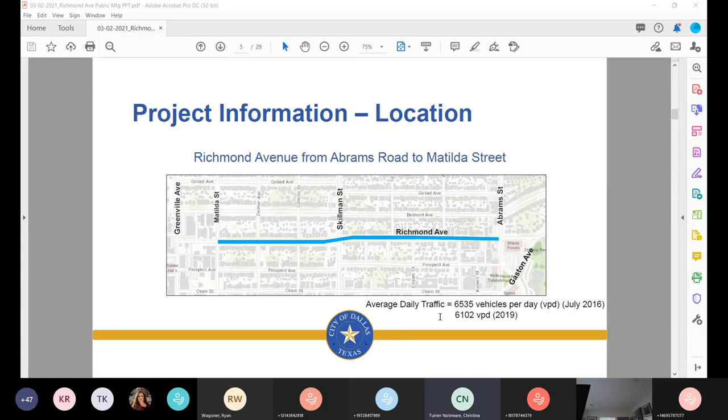The 2017 bond project did approve funds to do a pavement overlay on Richmond between Matilda and Abrams Road, at about $1.275 million. The intent of the project is to include bike lanes, physical bump outs at designated street crossings, enhanced painted crosswalks, and new flashing beacons at selected crosswalks, dependent upon funding and approval guidelines.

The Richmond and Skillman intersection will also be reconstructed to remove the channelized right turn lanes and install a new traffic signal. There's about $350,000 in the budget for that.

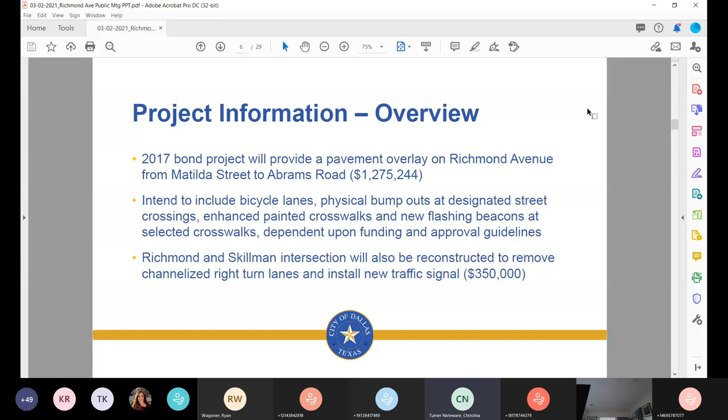At our October 29th, 2020 meeting, we had a public survey where we asked five primary questions: What do you like about Richmond Avenue? What should the primary goal be for the project? What's your connection with Richmond Avenue? What other improvements would you like to see made to Richmond between Matilda and Abrams? And then we had preliminary improvement options 1 through 5.

So we're going to talk a little bit about the feedback we received from the survey. We had 314 responses that came in. There were 37 that were very obvious duplicates, so we had 277 total responses.

Regarding the question of what do you like about Richmond Avenue, some of our most popular responses were 'not much' and 'nothing' - about 27 of those. Being able to park on both sides of the street, about 30 responses. A lot of folks talked about the neighborhood and the community, about 27 responses. And then about 19 responses regarding a wide street.

Looking at question number 2, what should the primary goal be for this project? We provided five options: the first being slow traffic, the second improve safety, the third improve the appearance of Richmond, the fourth provide options for alternative modes of travel such as biking, scooters, etc., and the last being other, which required people to enter text.

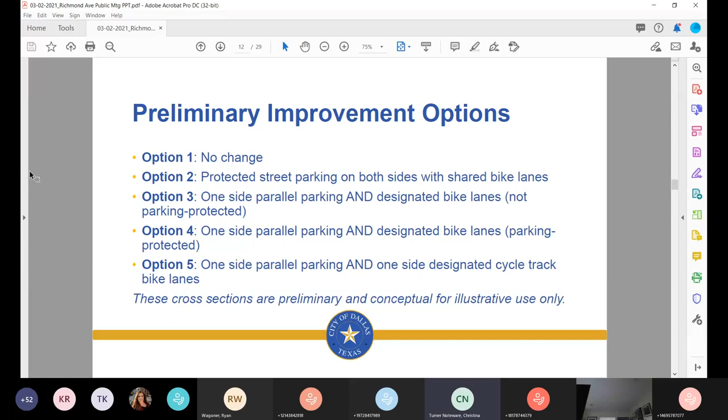Looking at the preliminary improvement options we provided at the last meeting, we had 5 options as a reminder, so we'll go through these one by one. Option 1 was really no change, leaving it with two 13-foot travel lanes and two 9-foot parking lanes on the sides.

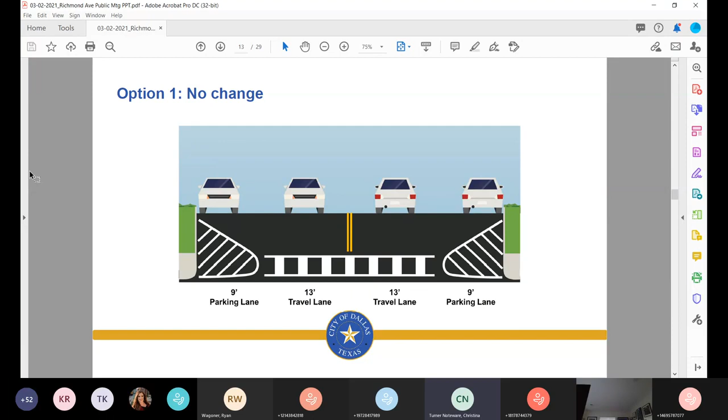Option 2 was protected street parking on both sides of the roadway with shared bike lanes. Option 3 provided one side parallel parking and designated bike lanes. Option 4 provided one side parallel parking and designated bike lanes, but that bike lane was parking protected, meaning the parking lane was between the drive lane and the bike lane. The last option had one side parallel parking and one side designated cycle track bike lanes.

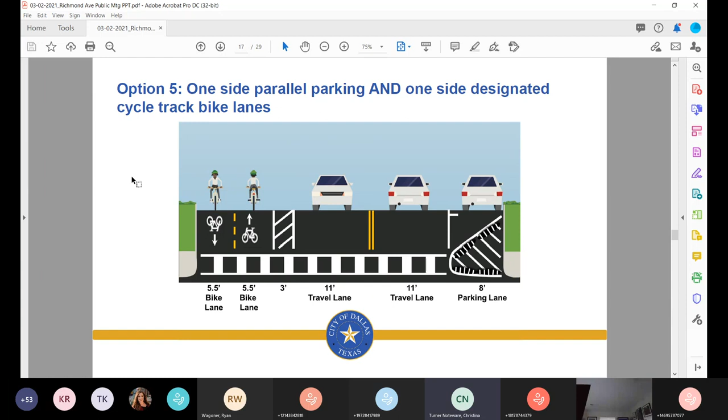After receiving and condensing this feedback, we looked at what most people wanted: one side parallel parking and designated bike lanes, not parking protected. But we also got a lot of comments about the parking and not taking it away. So we've provided some refined improvement options.

Option A is protected street parking on both sides with shared bike lanes—basically the former option 2 presented during round 1 public engagement. We looked at every possible way to try to provide parking on both sides of the roadway along with bike lanes, and there just isn't enough real estate between the curbs to safely make that happen.

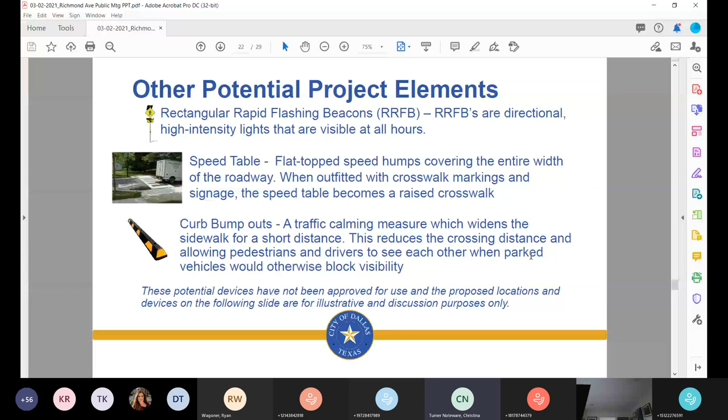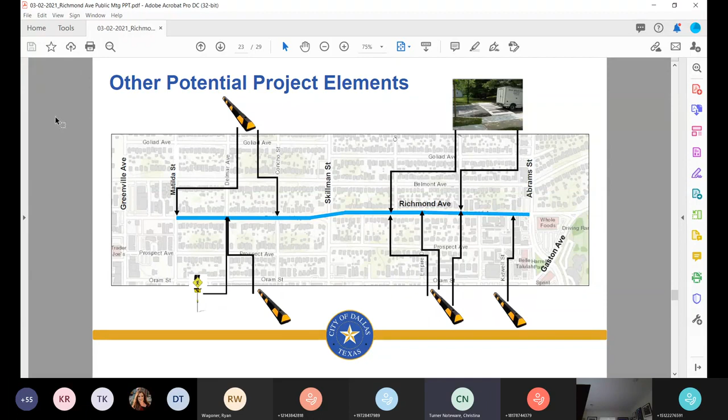We are also redoing the Richmond and Skillman intersection. Currently, this intersection, if you're going east, has a free flow right turn lane onto Skillman, and if you're coming west, you have the same thing, a free flow right turn lane. One of the things we're doing as part of this project is eliminating those free flow right turn lanes. We're installing new barrier-free ramps on all four corners.

We're installing a new traffic signal. We'll have one through lane of traffic each direction on Richmond, and then we have our planned bicycle lanes.

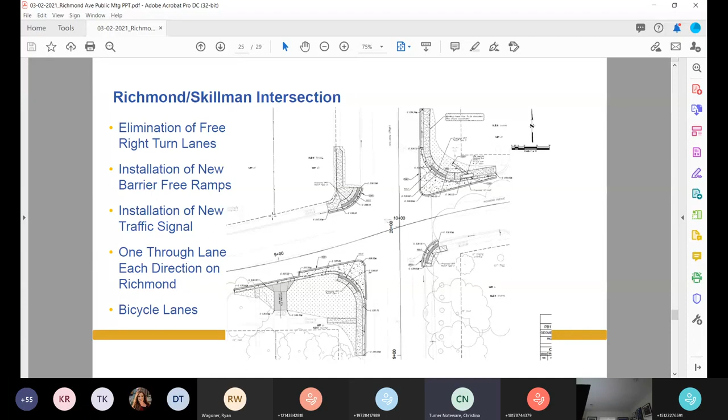It is mandatory to fill out the survey with an email address. We did not do this on the last survey. We're doing it this time to try and cut down on the number of duplicate responses we receive. The surveys are set up in Google, so you do have to have some type of a Google account, and it will ask you for an email address to do the survey.

The deadline to provide input is March 16th, that's 10 working days from today. So again, we want your input on which refined option you prefer, option A or option B, and if option B is selected for the project, do you prefer parking on the north or south side of the road?

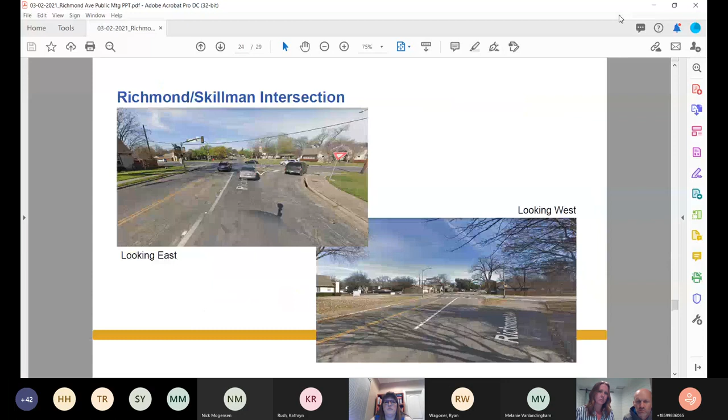I'm going to pull up this presentation here. Basically, our former option 5 showed a cycle track, where we would combine the 2 bike lanes into one location. But in order to do that, we have to have 11 feet of space to make that happen.

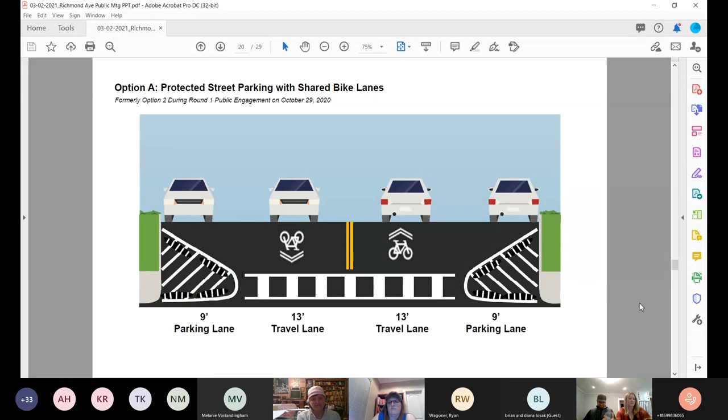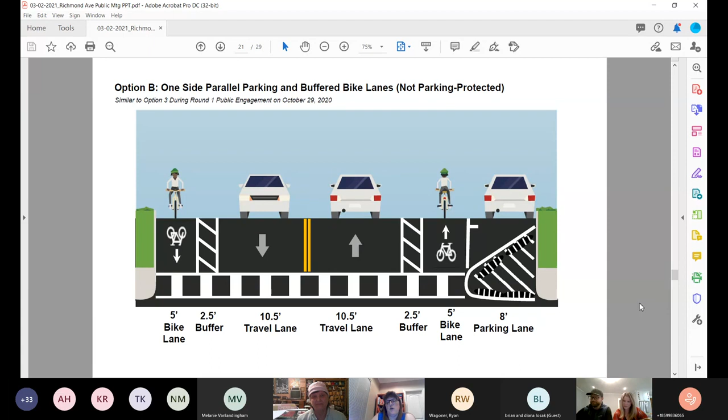Alright, so just one more time: option A, option B—we're asking, do you prefer option A or option B in the survey? And if option B ends up being the selected option, do you prefer parking on the north or the south side of the roadway? I'm going to bring this up one more time so you have the QR codes in front of you for the surveys. You can hit those QR codes right now if you'd like.